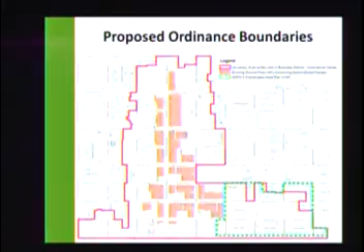This is the area we're discussing in terms of protecting retail uses throughout the downtown and SOFA 2 boundaries, shown in pink. The opaque pink blocks represent the GF district—this is the existing GF district shown in those shaded properties. The design standards we're discussing today will most likely apply to those GF parcels, but that's something we can talk about, and it would be part of the ordinance.

So just taking a step back and looking at what you have now in terms of design standards, I looked at the CD district, the P district, which is a combining district you see both in downtown and California Avenue, and then the downtown urban design guidelines. Attached to your staff report are those district regulations, and they mostly discuss guidelines.

They're not standards, but criteria for review for staff or the board as you're reviewing projects. They relate to findings and criteria around compatibility in terms of adjacent development, materials, architectural form, locating parking behind buildings, sort of good urban design and architectural design practices. And they do support a lot of pedestrian-oriented and architectural features that would be supporting pedestrians.

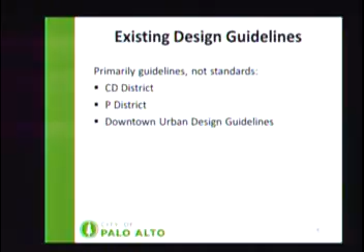So a high level of display windows or awnings, canopies, things like that. The downtown urban design guidelines are a little more focused on streetscape urban design, but also do talk about private development in terms of encouraging four-sided architecture, ground floor treatments that encourage pedestrians to see inside of windows, recessed doors, courtyards, outdoor seatings, things like that.

So in the conversations with the council, this was some of the design standards that were discussed with them and that they suggested going forward to explore further.

First is a taller first-story height, thinking about creating a high degree of visibility for pedestrians or even for drivers driving by to see into display areas. And then thinking about that in the context of the existing height limit. So how would a regulation of 15 feet or 16 feet work with the existing 50-foot height limit that's typical downtown? Second, regulating the percentage of window transparency.

Third, prohibiting reflective glass. And then lastly, window openings and transparent glazing to see into those display areas. So these would apply to new construction or really a substantial rehab project, but would not be applied retroactively to existing tenants or existing buildings.

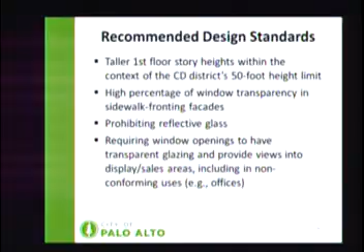So you saw in the report, we pulled together a few examples just to spur discussion of some of these issues as we're drilling down into these potential standards.

So first, in terms of first floor heights, thinking about what it would mean to regulate a first floor height in the context of the existing development that you have on the ground. You have this downtown that's really wonderful. It's evolved over time. You have older buildings, newer buildings, and how does the new construction fit in with the existing architectural context?

Just looking at this one block, even though you have 3 separate buildings and different architecture, the first floor height, at least from this perspective, is somewhat consistent. So thinking about variety in the context of developing a regulation, and that you might only have properties redeveloping one property per block every couple years or something like that.

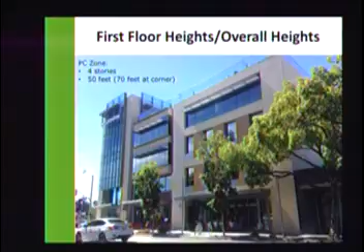And then looking at this in the context of some more recent projects and thinking about that 50-foot limit. In this case, you have a 4-story portion of the building on the right that meets that 50-foot limit, but within 4 stories. They couldn't fit in 5 stories in the 50-foot height limit based on the first floor height and perhaps other mechanical or design issues of the upper floors.

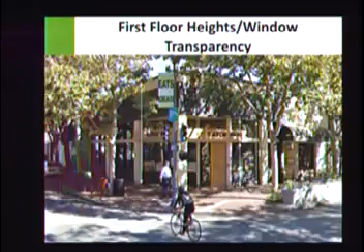And then looking at the window transparency, in this example, this property recently had some facade improvements done. You can see in those notations that the first floor, ground floor windows go up to 15 feet. You have sort of a clerestory window up above, and then these storefront windows at eye level.

Here you have essentially a wall of 3 feet at the bottom, which kind of allows that the tables that are inside, people's feet sitting and dining, you can't see them. It gives a little bit more flexibility for the tenant inside to maybe locate fixtures along the wall or tables and have a little bit more privacy. They do have some curtains that can be drawn at certain times if you have sun focusing in on the restaurant.

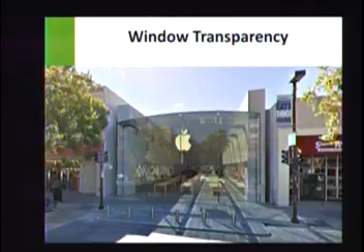And then by contrast, the Apple Store has this 24-foot glass wall. In this case, they don't have fixtures up against the windows. They have a limited amount of merchandise that they're selling, and so this works for them. But if you're thinking about this type of a minimum percentage of transparency, not everybody is going to have their needs accommodated in this 100% transparency example.

So we did look at a few other cities in terms of their regulations for transparency. San Francisco and Santa Monica having 60 and 70% transparency within this sort of eye-level window, so between 2.5 and 8 feet in Santa Monica, or 4 and 8 feet in San Francisco.

In San Carlos, you see something a little bit similar, 60% minimum transparency within that eye-level sort of view between 2.5 and 7 feet, but just within 20 feet of the front door. So a little bit more flexible there.

And then, as I mentioned, we're also directed by the council to look at non-conforming tenant spaces. So again, these might be financial services in the GF district, or even a yoga studio between classes, and the idea of encouraging displays or artwork or other items of visual interest, either it's between classes at a yoga studio, opening up the curtains, but trying to encourage more visual interest at the ground level for these non-conforming uses.

So in terms of timing, the urgency ordinance is expiring in April, so we're looking to adopt a permanent protection before that time. Right now, we're meeting with various stakeholders, residents, developers, architects, the board here today to discuss this evolving ordinance, and then looking to go to the Planning and Transportation Commission and the City Council in the next couple months.

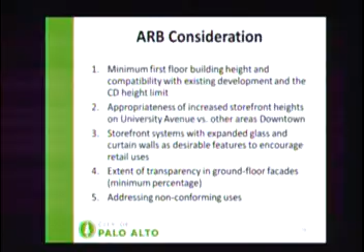So that concludes my presentation. I'm happy to answer any questions. Thank you. Are there any questions of staff? I have a question.

When we're talking about the first story heights, the 15 or 16 feet, I realize that won't be for existing tenants. However, you did mention that for new buildings or even for rehab that may be a standard that is adopted. How would that be adopted for a rehab space? Let's say a building already only has a 10-foot first floor. I would say most likely the first floor height probably couldn't come into play for a rehab. Maybe the window transparency if they're replacing the whole storefront. So not all the standards, but to at least try to adopt some of them.

Right, okay, that makes sense. Thank you. Anything else?

Okay, I'll open it up to the public. Is there anyone here that would like to address the board on this item? Seeing none, I'll close the public portion, bring it back to the board.

Peter, why don't you start? Sure, thank you. I think I have probably a lengthy approach to this, and I'm wondering, Robert, though, it looks like Alex also has a presentation. I did a quick informal unscientific survey just walking around University Avenue, and there's about, I'm looking at my records here, maybe 8 different storefronts I noted and want to make some points about. But can I ask what Alex has got cooking up too?

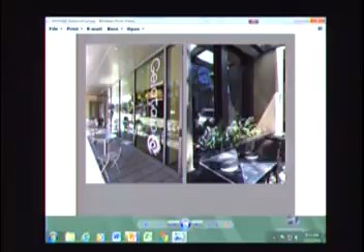I have 2 points. One is that glass has changed, even clear glass has changed, and this is our California Energy Code. So even if we require clear glass, the reality is the amount of transmittance is going to be down in the 45% to 65% range, compared to an old building with single pane clear glass, which would be like 90% transparency. And the California Energy Code is getting stricter, like every 3 years. I would imagine it's going to continue on that trend.

So if you look at the image on the left, it's half mirror-like and fairly dark, you can't really see very much inside. And the Joya on the right is probably even worse. But I'd argue the Joya on the right has canopies, special window mullions, a planter, and seating. And I'm arguing that we actually have to have all of those, and those are in our P guidelines, or P zoning, right? But those aren't required in just the GF zone, if I have that correct. The CDC, right, GF.

The way I read it, they're not required. These are guidelines, findings and criteria for review. So I'm arguing that all the things we do for the P zone—the recesses, planters and awnings—to me those are highly desirable throughout downtown, even if it isn't an active retail use.

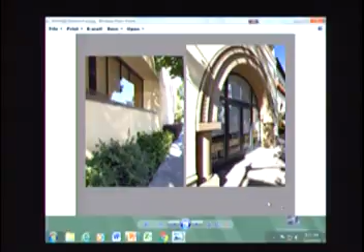I'd argue that's not so desirable, at least where buildings are right up against the sidewalk. We have a new building downtown on Hamilton with a setback that's half a level up, but it has more glass than this image on the left, and it works—I'd argue better than the image on the left, which is on Lytton.

But there are some things—if a building only has like 25% glazing and it's half a level up with blank walls, it just doesn't work very well in the downtown area. So that's what I have.

I will pass it over to Peter. Okay. Thank you, Alex.

In the same vein, although I don't have photos, so everybody use your active imagination. I started out thinking what really makes storefronts pedestrian friendly is having a lot of people around, inside and outside. It's obvious to say, but what really makes that happen?

I went over to Paris Baguette, used to be the sofa store, and looked at their store. They have 25 feet of frontage and a very large recessed area at the front with cafe tables. The place is bustling—I'd certainly say that's successful from a pedestrian friendly perspective.

They also have glazing on pretty much the whole street frontage, and as far as I could tell about 50 feet around the corner—fairly transparent glazing, pretty much from 10 feet up down to the floor.

Further up the street is a tiny shop, Caffe Venetia. It's an old storefront, only about 15 feet of frontage, but they have a very large, traditional recessed area in front—about 75 square feet of floor area.

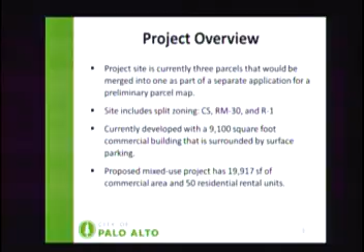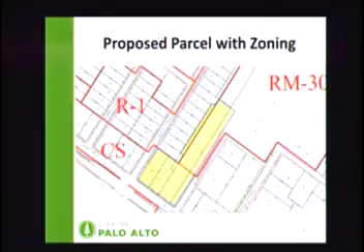The project includes 2 separate buildings: a 4-story building proposed in the area zoned CS. It includes ground floor retail and commercial, 30 residential units, and 1 level of underground parking.

The second building is a 3-story building located in the area zoned RM30. It includes parking on the ground level and 2 stories with 20 residential units above.

A parking adjustment request of 1% is requested to provide 192 spaces instead of 194. An additional adjustment may be required for the proposed location of 8 parking spaces. As designed, the project requires a design enhancement exception for a 5-foot encroachment into a 10-foot required setback and vegetation screening buffer.

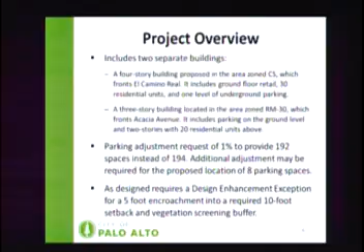Key issues are highlighted in the staff report and include consistency with the zoning code, consistency with the El Camino Real design guidelines, consistency with the performance criteria, and consistency with the context-based design criteria. Staff is seeking ARB input on the project's overall design and consistency with the design criteria.

Next steps include review and incorporation as appropriate of ARB comments, finalization of studies and the draft CEQA document, and then the site and design process requires review by the Planning and Transportation Commission. It would come back to the Architectural Review Board for a recommendation, and then City Council.

Staff recommends that ARB provide direction regarding the proposed project's overall design and its consistency with applicable design guidelines, and continue the project to a date uncertain. No recommendation or action is requested. Thank you.

Any comments or questions of staff? Actually, I'm sorry, Chair, just if I may. Sure. Because this is a quasi-judicial matter, we just want to make sure that commissioners have an opportunity to express any ex parte communications before we commence further with the dialogue. Thank you.

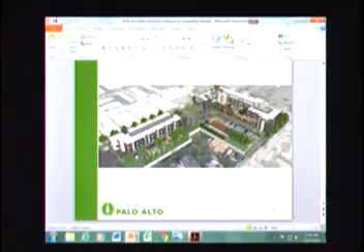I guess I had 3 questions. I'm still not clear - the design enhancement exception, is that to allow the ramp for the parking to be closer to the neighbor's property? What is it for? Yes, it's an encroachment into the 10-foot required setback. What is encroaching? The ramp is encroaching. And it's also a 10-foot required vegetation screening under the performance criteria.

Yeah, so there's... just put it out there for the record. What is it that we're talking about here? I never got this - well, I kind of got it late. If you look at the date on this one, I think it came down yesterday.

If you watch the pointer on the screen, there's a grade change along El Camino Real. It's a little bit higher here versus here and here. Basically the railroad right-of-way comes through here, and it's slightly higher where that former railroad was. So the center of the site, of the frontage, the El Camino frontage, is a bump in it? Yes.

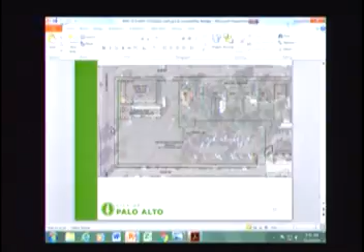I didn't notice it when I spent about half an hour there, but okay, I guess I'm just kind of blind. Lastly, through the chair - Robert, there was a number of back and forths about the appropriateness of this whole hearing to begin with. Could we get staff to put on the record what's going on and why we should be hearing this?

Through the chair, it's your call. You're talking about the email we got last night, and then staff's response to it? Yes. So staff did respond to Mr. Borak's comments about this hearing. The applicant did not apply for a preliminary review, they just applied for a formal application, and so that's what we're here with today.

We are considering this to be the first of 3 hearings that we would normally do with a formal application. And as far as fees are concerned, we take deposits on these major ARB applications, and all of our hours are recovered through that deposit process.

Yeah, I felt comfortable when it was sort of a fee-based type situation where they just draw from an account. I found everything to be reasonable. I just wanted to have it put out on the record.

If there are no other questions - I mean, I agree that this seems to be a no harm, no foul situation, even if somewhat unusual. But I will say that since I don't have the benefit of sound studies and other data that CEQA documents would give me, I may object if you tell us we've hit our 3, including this one, should we ever get to that point. Yes, and that 3 is at the director's discretion. We have the ability to have additional hearings if needed.

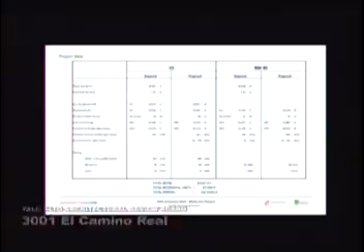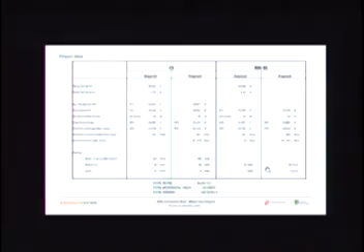Here's the data. We'll talk, I'm sure, about parking, but this is pretty straightforward in terms of floor areas and parking required. I think staff has shown that we're complying with the numbers in terms of floor areas and heights. There is a discussion we'll have about parking and shared use.

This slide demonstrates some of the challenges in terms of topography. In terms of parking and entry for mixed use, the vehicular traffic is off of El Camino pointed to Acacia, and the main vehicular entrance is right here. We've taken the vehicles and transportation coming in for all the residential uses, and really the bulk of the retail use, and directed that to a mid-block situation here. The turn in the circle prevents cut-through traffic to Olive, and it also directs them to the ramp to the subterranean parking.

Note that the ramp starts at the very back of the adjacent R1 parcel - this was intentional - to get those cars ducking down and below grade before we're next to a home. So we think that is a very nice design solution there.

The other surface parking that would serve the retail use - there's only 30 spaces - is accessible off of Olive right here. We've limited and provided really a minimum kind of amount for retail that works well for quick pickup, drop off, or jump in on a trip, and that's limited to the 30 cars right here on Olive.

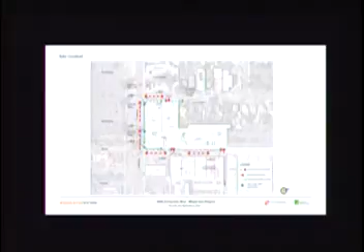Couple of cross sections through - well, there's the architectural site plan. We'll get to the sections. We've put a lot of effort into the landscaping around the perimeter, as well as the amenity spaces.

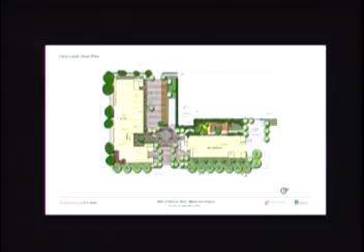We have some very nice buffer on the portion called out as the R1 leftover zoning area here, with nice landscaping and features across the back, heavily planted to meet our stormwater retention and guidelines. There's also an amenity space for the building on the second floor of the CS building, located far away from our R1 zones - I think this was about 75 feet, or actually more than that, I think over 100 feet to the back here.

Cross section - you can see how we're handling our heights here. The 50-foot high portion of the building is pushed out to El Camino, and then we respect that 150-foot circle and drop the building heights down as we approach and get closer to the R1 zones.

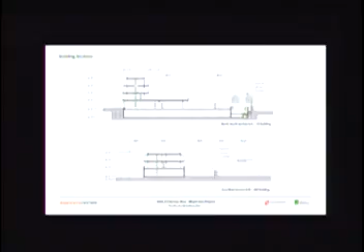The cross section here shows this adjacency with the single-family home, which on this drawing is shown there, but is pushed very much to the front of their parcel. You can see the setback in question and then the ramp diving down to the garage below.

We did put in the building that was approved here, so you could see some context in terms of what was approved. And we've taken that also in terms of our mass and bulk, materials and colors, and used that as cues for our design.

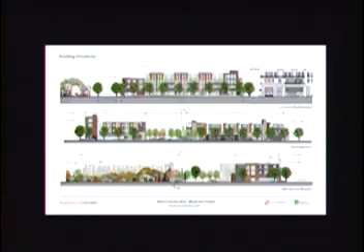We feel very good about the design use of materials. I think this will be a nice addition on El Camino and picks up on other buildings too that have been approved closer down to Page Mill, with that variation of plane, color use, and then some higher quality materials at the corners. There's a sample here - this was also included in the submittal package.

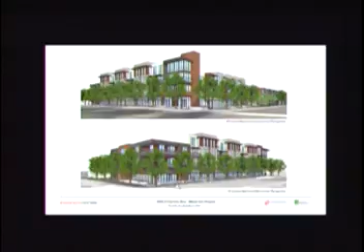And then there are a few renderings here to illustrate the overall architectural design. Okay, so thank you very much. Be excited to answer your questions. Any questions of the applicant?

I have a quick question. I was looking at the building section on A 4.1. I don't think it was actually in your presentation, but in our packets, if you look at the left portion of that building section, it looks like there's a parking stacker.

Yes, we are proposing in the basement along the Acacia frontage - we have provisions in the plans to allow for mechanical parking on that well.

So do your parking calculations take into account the stacked spots as well? They include the stack spots in an intensive use. The most intensive use we saw on the retail side would be a restaurant. So the plan was to build - we conform without putting the stackers in if it's not a restaurant. We would put in the pit, and you can cover the way those are designed and manufactured.

We build the pit with the basement, and then there's a series of metal plates that cap that off. If there was a conversion or a time when the parking was needed, they can go ahead and install the system, but the physical bones to do the stacker is in place and built from the outset. So the stacker would really be to provide enough parking for a restaurant if it were a very intense parking situation, yes. Okay, thank you.